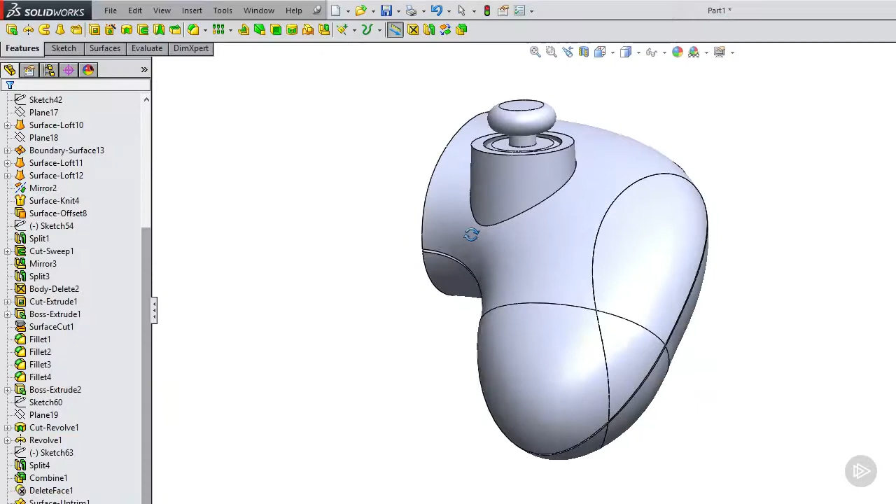The first thing we need to do is choose the mirror tool, and the mirror face is going to be the right plane. Let's choose bodies to mirror, and we're going to select all these parts that we have here.

Make sure these are unchecked, and we're going to hit the check. So now that we have all these separate parts here, we need to actually combine a few of these, and we can do that by choosing the combine tool. Let's make the upper half one part, and we're also going to make the lower half one part.

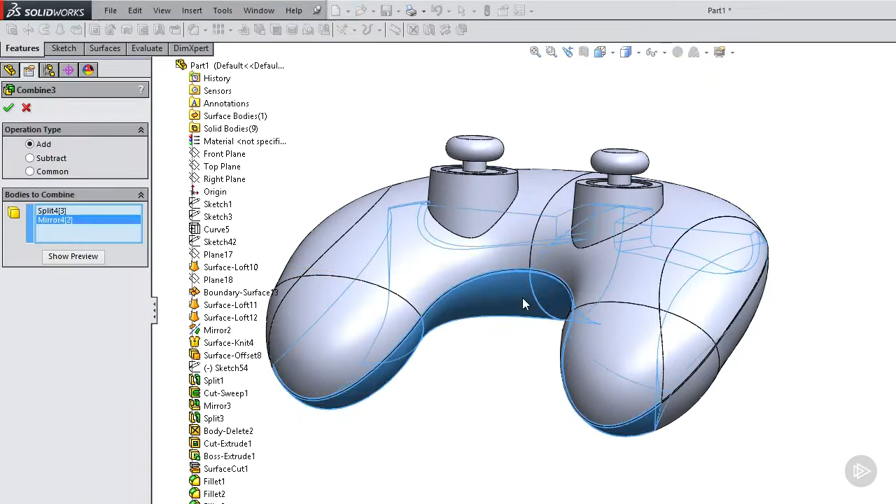So now, in order to get these parts split out into an assembly, what we need to do is open a new part, and we need to insert part.

You can see I already have all my parts split out already, but for the sake of this tutorial, I'm going to show you how to do it, and we can move on from there.

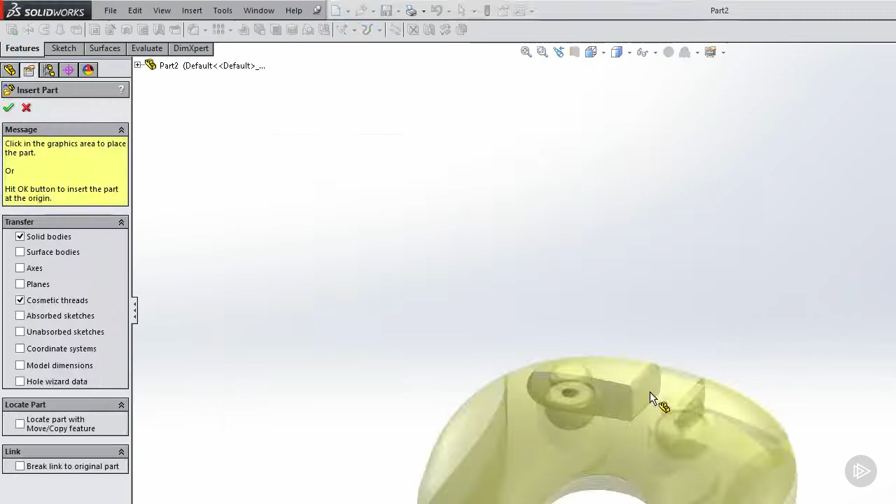So let's do insert part. I'm going to choose the main body. You can see I haven't clicked anything yet, I'm just hovering the mouse here. We're going to hit the check.

So let's place it exactly where I left it. I shouldn't have to move anything.

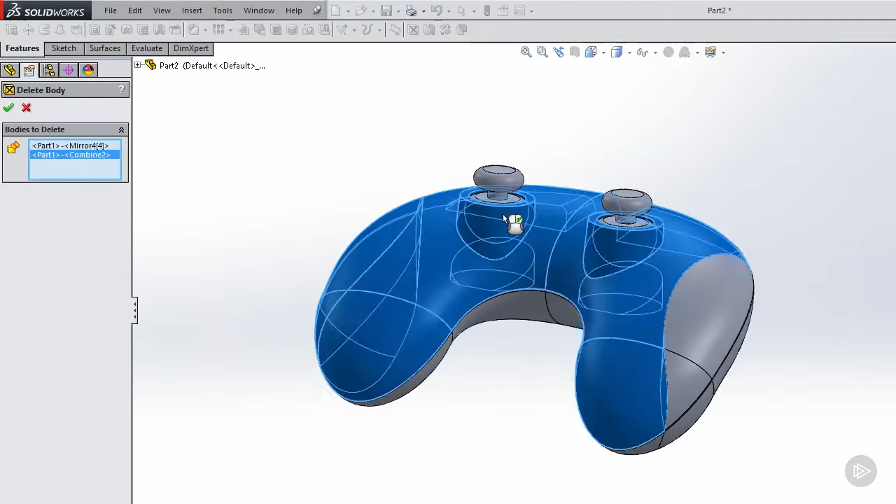Let's say for this first part, what we want is just the top of the controller. So I'm going to delete everything else except for that part, like so.

And I can save this as top of controller as an example.

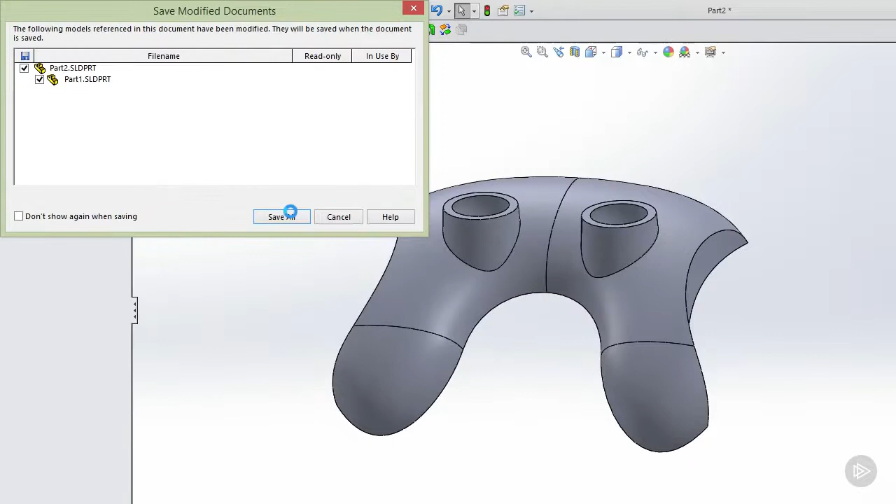And that's it. So the idea is to do this with all of the parts, and then once they're all saved, what we can do is open them into an assembly.

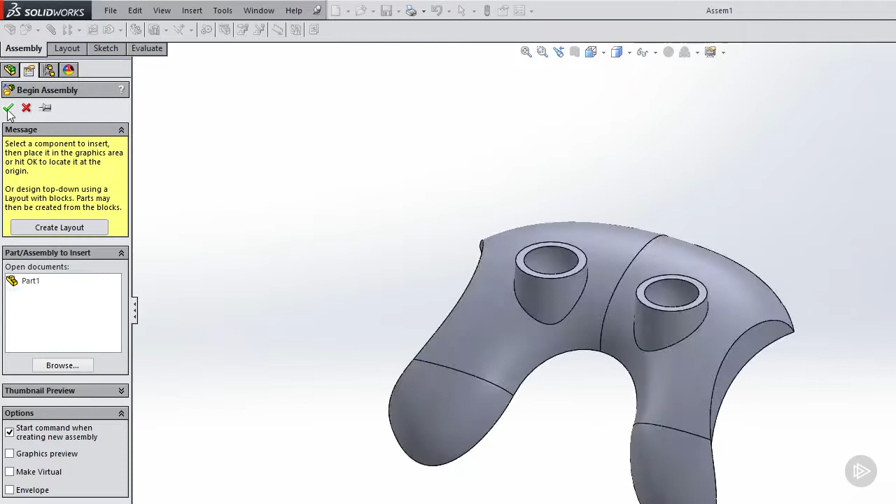So we can say make assembly from part, and it shows us we have the top of the controller here in this box because the file is open. I'm just going to hit the check, and there it is.

So because I have the rest of the parts already saved out, I'm going to show you exactly how we're going to insert the parts into this assembly. If we choose the Insert Components button, because I don't have them open, I have to click Browse.

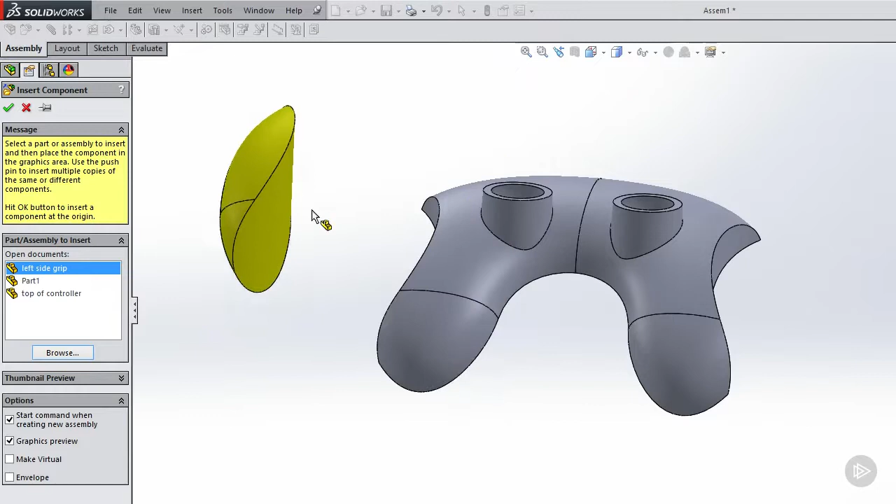Let's choose the left side grip. You can see I haven't clicked yet, and it's floating right now, but as soon as I hit the check, you can see the part snaps right where I left it.

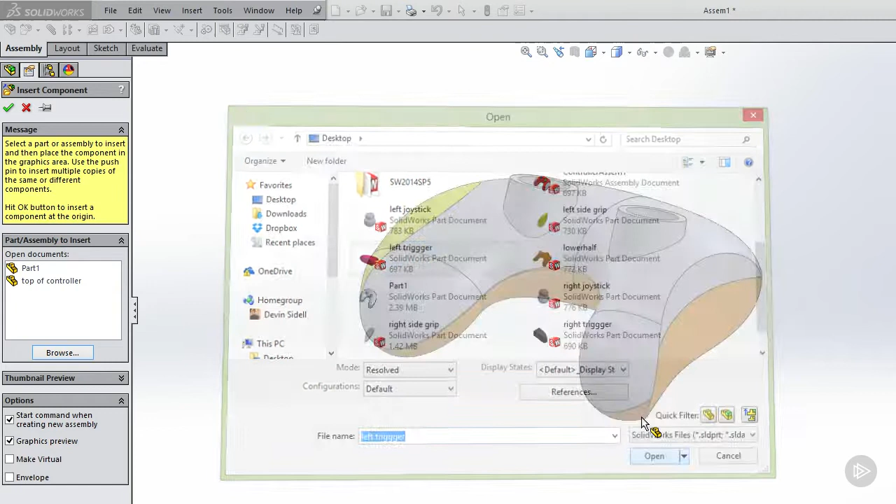So we're just going to go ahead and do this for the rest of the parts. So we have the lower half, left trigger. Looks very nice so far. Do the left joystick.

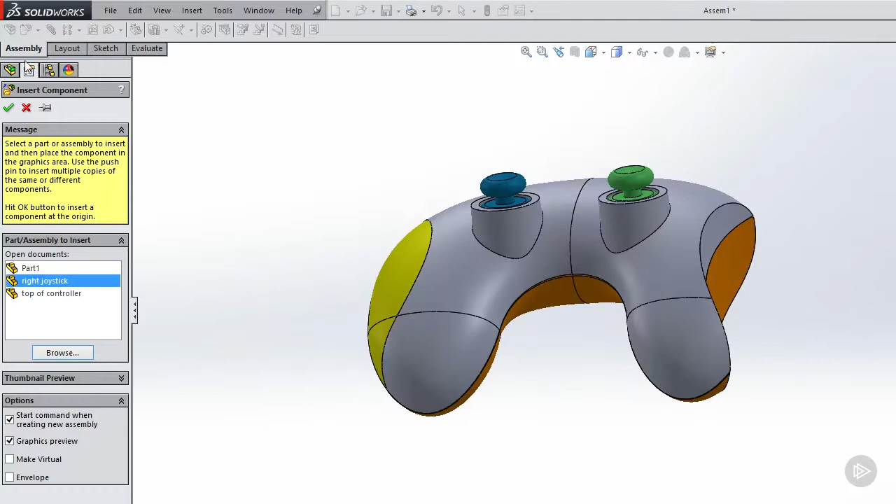And I'm just going to quickly do the rest of the parts here. Now if you have all the parts already open, this process would be a lot quicker, but just for the sake of showing you how this is done, we're doing it step by step. And for the last part, we have the right side grip.

That's it. So you can see I have these saved all as different colors, and that way in KeyShot you can understand which part is which.

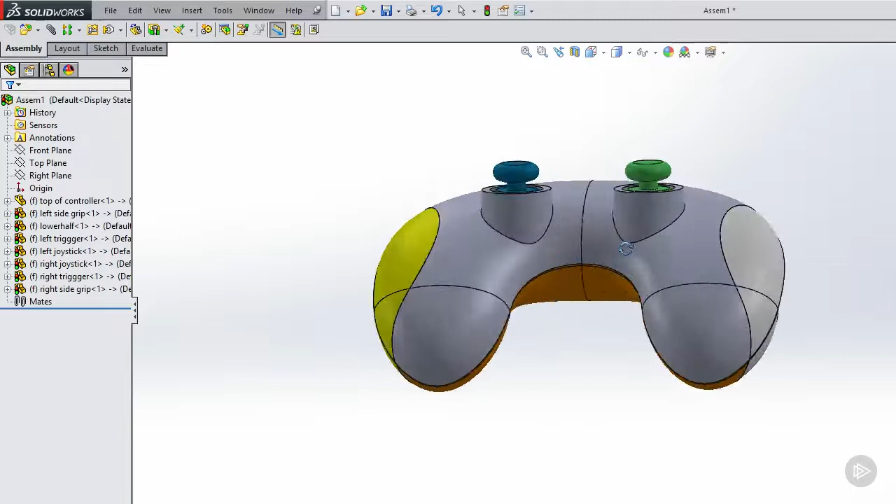Now for the next lesson, we're going to go in and we're actually going to add some details to the controller, like fillets, chamfers. We're going to add some sketch text to the triggers here, and we're going to do some shelling as well.